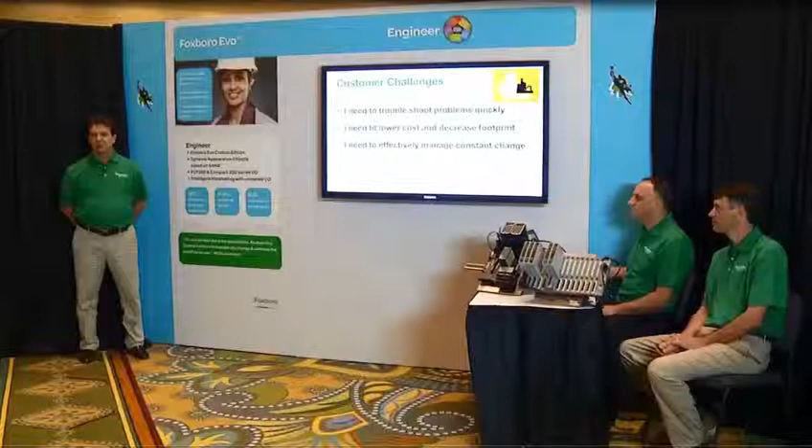Hello, my name is Stephen Galemi, Technology Manager, Control Room Operations. I'm joined today by two very experienced TSCs, Peter Braun and Jim Rathburn. Peter has over 20 years experience in the batch industry and with safety systems. Jim has over 20 years experience in the power industry doing design and plant startups.

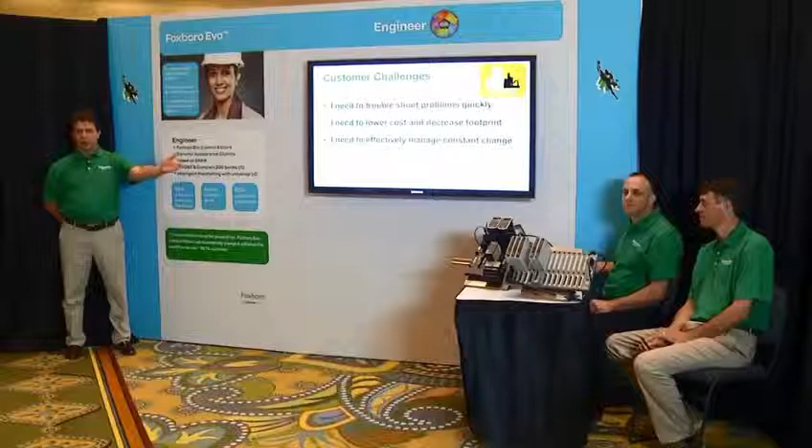What I'm going to talk to you today about is the Foxboro Evo automation system and how the Foxboro Evo automation system helps solve the challenges to engineer. The challenges specifically we're going to talk about today are as follows. The need to troubleshoot problems quickly, the need to lower cost and decrease footprint of the system, and the need to be able to effectively manage constant change in the plant.

To describe these challenges and how we're going to solve these challenges, we're going to use a little scenario which requires that the two engineers in the plant have just finished implementing a large design change notice, and now they're finishing up the work to complete that effort. The design change notice will include over 3,000 discrete I/Os, over 1,500 analog I/Os, and a small amount of I/O in the field associated with a skid-mounted unit.

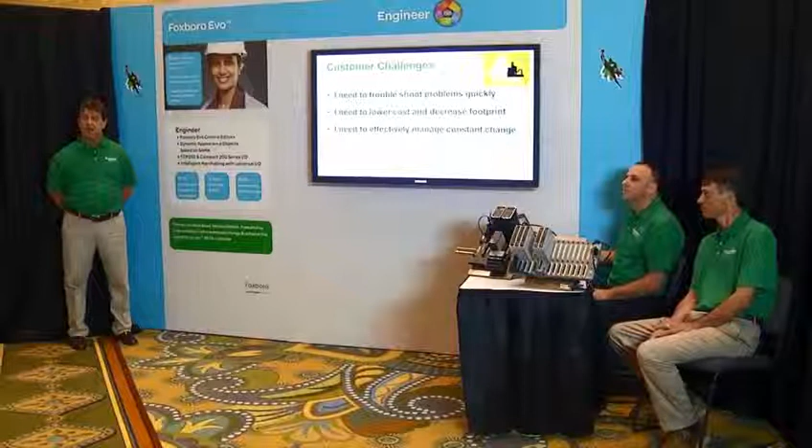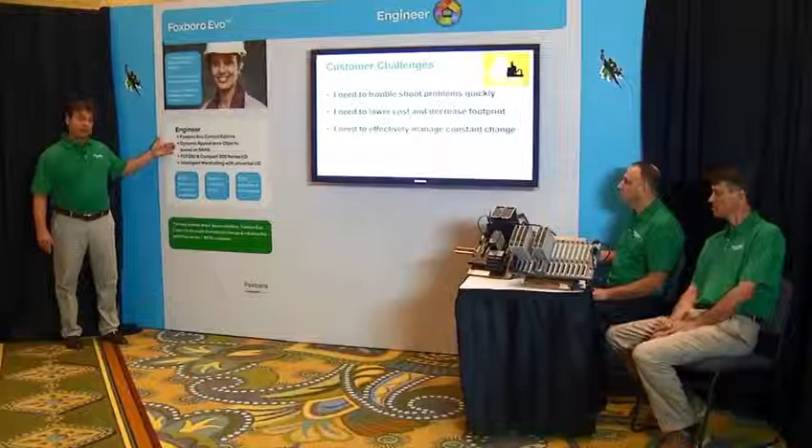The features we're going to use to help the engineers solve these challenges are the Foxboro Evo control editors, the dynamic appearance objects based on SAMA, the FCP280 and the brand new Compact 200 Series I/O, and the intelligent marshalling with universal I/O. With that, I'll turn it over to my two TSCs to go through the role play.

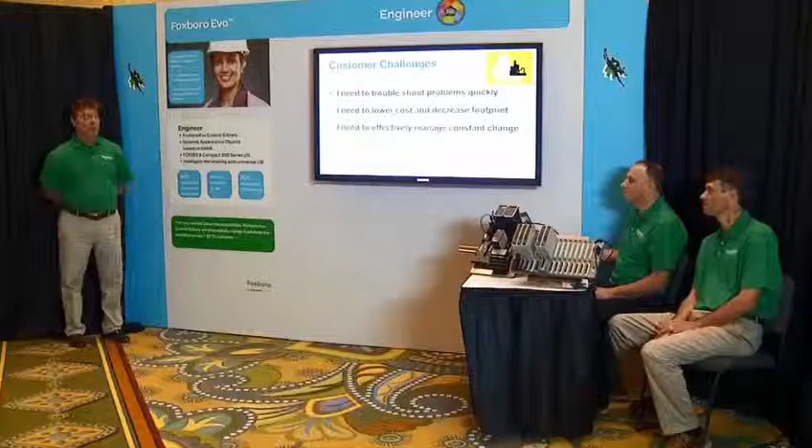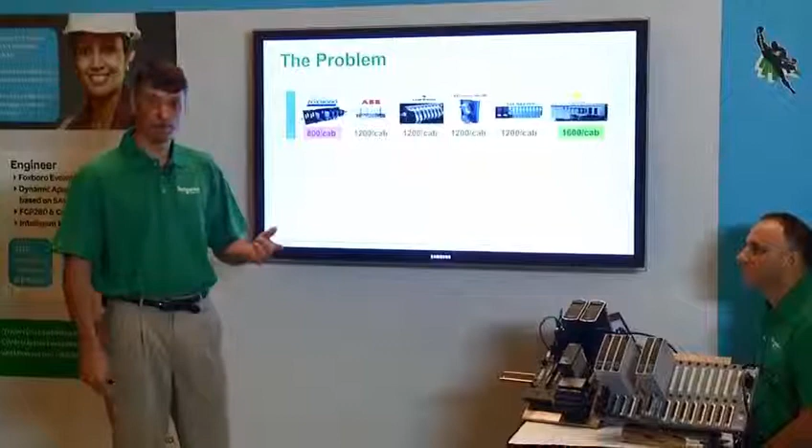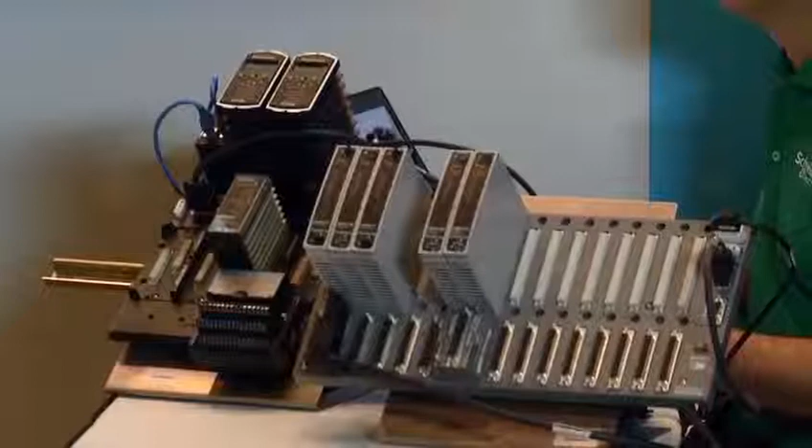Thanks, Steve. Historically, when it comes to large-scale competitive bids, the Foxboro company has been at a disadvantage. The footprint of our I/O was just too big and too clumsy. We can put 800 points into a cabinet where our competitors can put over 1,200. The solution to this problem is the new Foxboro Evo 200 Series I/O in the compact version. These new slim designs allow us to put 16 I/O cards in the same space that it used to take 8 I/O cards, thus doubling our I/O capacity.

We now are able to put 1,536 analog points into one cabinet or 3,072 discrete points into one cabinet. This now brings us to the higher end of the spectrum of I/O capacity.

Okay, thank you, Jim. The next challenge we're going to talk about is the need to be able to effectively manage constant change. In this scenario, we're going to talk about two aspects. We're going to use the universal I/O to help us address that, and we're going to talk a little bit about automation of the safety integration files into the automation system. With that, I turn it back over to my two TSCs.

Peter, I got some bad news for you. It seems that the universal I/O that we configured last week out in the skid is wrong. We have a bunch of points that are now externally powered. They need to be internally powered. We're going to be down for a couple of days to fix that. I have to go get a work order, and I have to send someone to a hazardous location to do the rewire. That's not a problem, Jim.

The universal FBM is software configurable, and everything we need to do, we can do from the engineering station. Everything, but this is a wiring change. We need to send someone out there to rewire these points. It's not a software change. No, it is a software change. The universal I/O configures everything from the engineering station, including whether inputs and outputs are powered from the DCS or the field. Let me show you how.

From our engineering tool, we have a pull down for the configuration of the universal FBM that allows us to select from a simple pull down whether the inputs, in this case analog inputs, are externally powered or loop powered. So I can just select loop powered for the two inputs that are faulty, and it's fixed. Wow, that was easy. And it saved me all the aggravation of dealing with management, and I didn't have to put anybody at risk. Foxboro Evo is truly amazing.

Okay, thank you very much, Jim. Now we're going to talk a little bit about how we can automate the integration from the safety system into the process automation system. Peter, another challenge has come up. We just changed 50 points in our safety system, and they've yet to be integrated into the DCS. Can you show me how that was done in Foxboro Evo? Yes, that's very straightforward, Jim.

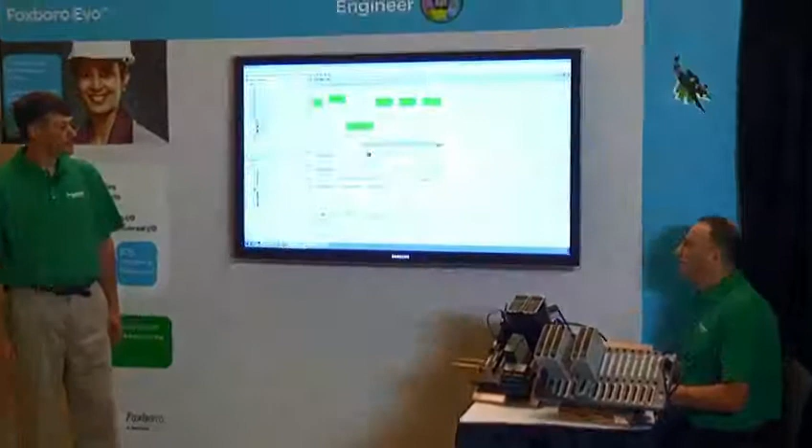We can take the configuration file from the Tricon system and load it into our configuration tool, Foxboro Evo. And we simply select the points that we want to bring into our DCS. We then generate a simple file, and after saving it, it generates a file that we can then generate using the bulk data object. That will then automatically create the objects we need in the DCS to interface with the Triconex system.

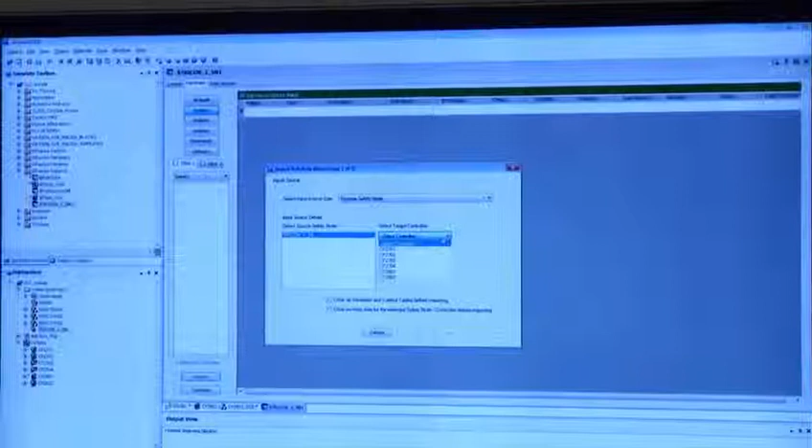So I've just created that file. If I go in the bulk data object, I can select the Tricon node that I want to interface and the CP that the data will come into. Say OK to generating the new points. And then it's a simple matter of clicking generate.

And now all of the blocks that are required to talk to the Tricon are automatically configured in the DCS. And all the blocks that you need to add and delete were done automatically? Yes. And you didn't have to type in any information? No, I only had to enter the data once in the safety system and it's automatically configured in the DCS. And that completely eliminates human error? Yes. Wow, Foxboro Evo is truly amazing.

Great. Thank you guys.

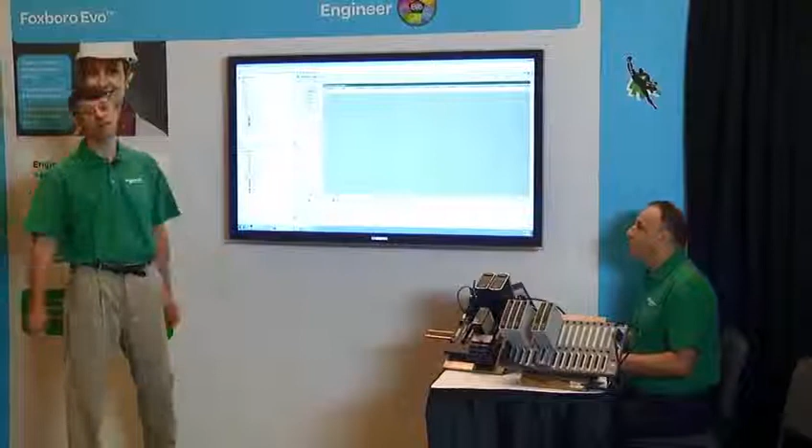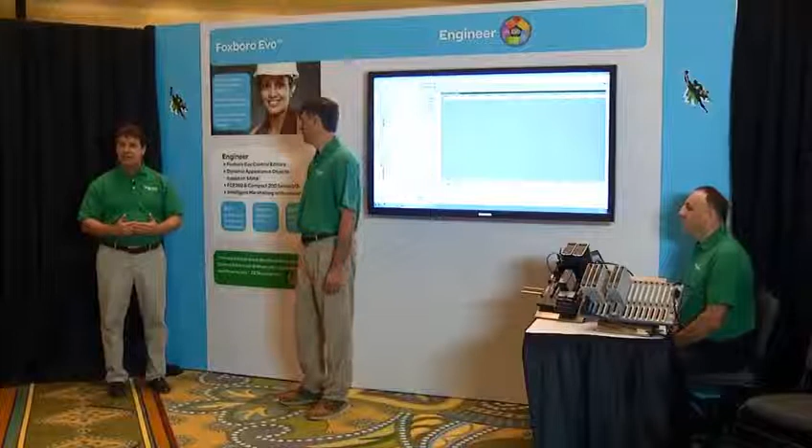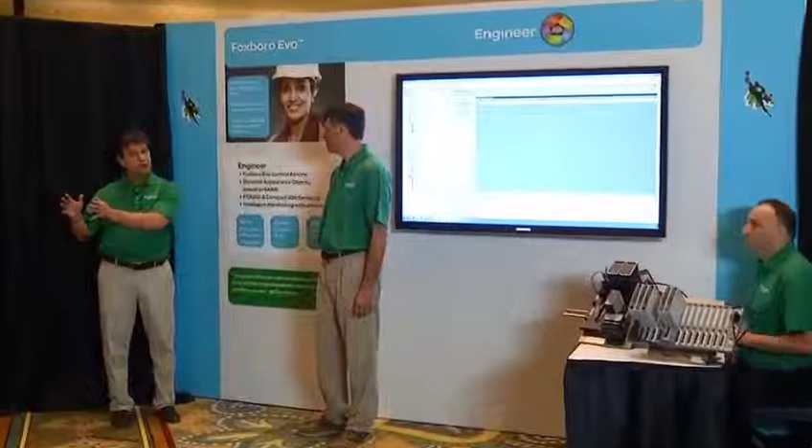What we just heard was how the universal FBM and safety integration help solve the challenge to effectively manage constant change. The universal FBM allowed us to stay in the control room and implement changes all from the control room, eliminating the need to send personnel into a potentially high-risk environment out in the field in a hazardous location. Additionally, the automation of the safety integration allowed us to automatically take the configuration file from the safety system and automatically create the Foxboro Evo control interface database.

Very good, thank you.

The next challenge we're going to talk to you about today is the need to be able to troubleshoot problems quickly. Today we're going to do that under the scenario using the SAMA dynamic appearance objects, and I'm not sure if you've heard about SAMA or not, but you're going to find out about it right now. With that, I'll turn it back over to Jim and Peter.

Peter, just got off the phone with operations. We have another issue. Our airflow signal seems to be off, and we need to troubleshoot that loop. Do you have an easy way to do that with Foxboro Evo? Yes, that's no problem, Jim. We can use our dynamic appearance objects, SAMA diagram, where we can see from the strategy a graphical representation of our function block configuration. Wow, that's cool. I see the problem already. This is supposed to be an average, not a high select.

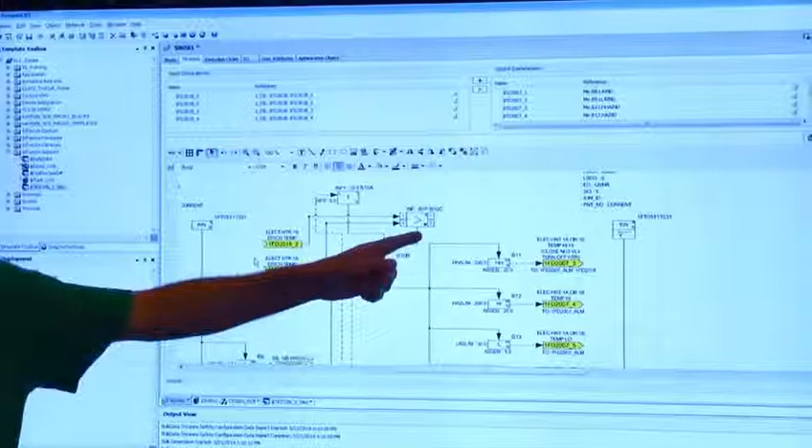Can we change that here, or do I have to go somewhere else? That's very easy. I just double-click the SAMA object to open its configuration screen, and I can change the mode in this case to do an average of the two inputs, and then save it. Wow, that documented your change as well. I don't even have to go through drafting, and I don't have to worry about another engineer coming along later and not knowing the changes I made. That's truly self-documenting. Truly amazing.

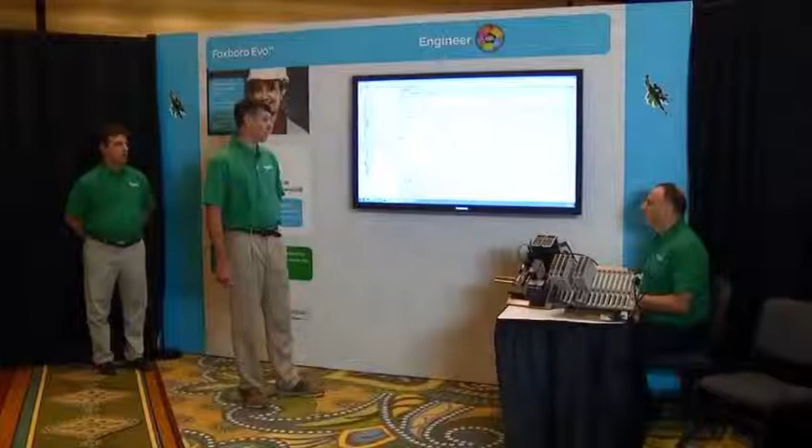We have another problem we have to deal with too. We have a motor that's not starting. Can we do this in Boolean as well? Yes, we can also see the Boolean logic from the same strategy diagram. Use the motor logic, and we can see all the inputs to the gate that controls the starting of the motor. Well, that's all fine and well, but it's just showing me a logic drawing. I don't know which points are true. How can I troubleshoot this? We can very easily switch it into live mode to see the status of all the points on the logic diagram.

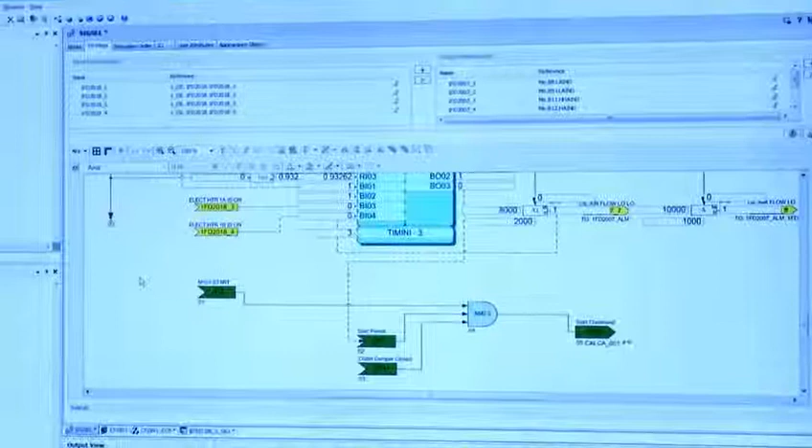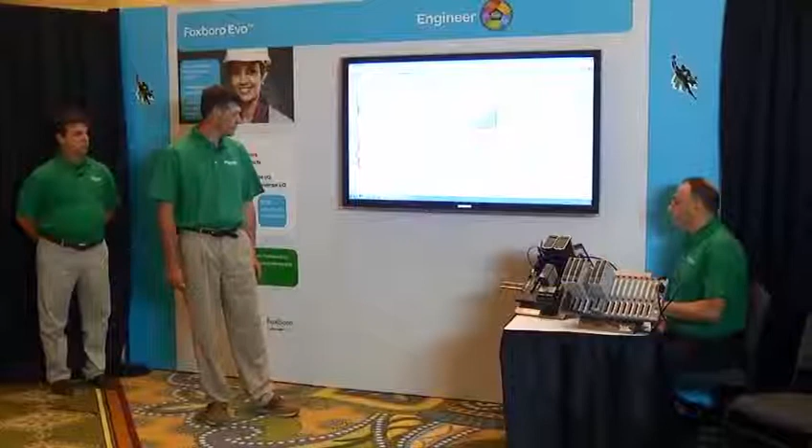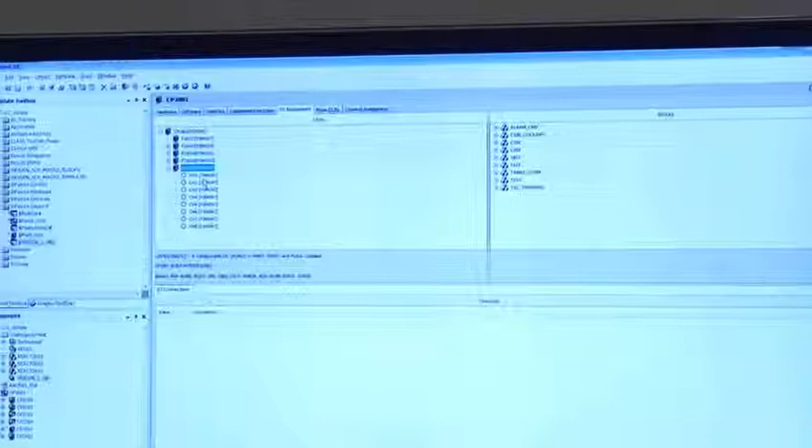We can see the I/O allocations directly from the configuration tool. If I call up the controller, I can see all of the FBMs connected to that controller, and also the I/O allocation of each FBM. I can see here I have a free FBM that has no I/O allocated, so we can use that. And because it's a universal FBM, we can configure each of the channels to suit the I/O requirements for the new pump. You mean the same I/O card is going to do analog ins, analog outs, digital ins, and digital outs? That's correct. That'll reduce my footprint even further. I have one FBM where it took 4 before. Foxboro Evo. Truly amazing. All right, very good.

Thank you, gentlemen. So what we just heard was how the dynamic appearance objects based on SAMA provide a very intuitive view of the control strategy, making it very obvious to see what's going on inside the control loop. Additionally, when the configuration of that control loop was changed, the drawing automatically updated, making the documentation as-built all the time and eliminating, as Jim talked about, the need to go to drafting and redline and check all that, completely eliminating the human error.

In addition to that, by using the live data display to troubleshoot the Boolean logic, we were very quickly able to determine that the startup permissions were not satisfied, and that needed to be addressed before the motor could start. However, the pump was down, so we had to rewire in a new pump. And by using the Foxboro Evo I/O referencing, we could easily determine where a spare point was located on the system.

Very, very good, very exciting. Thank you very much, gentlemen.